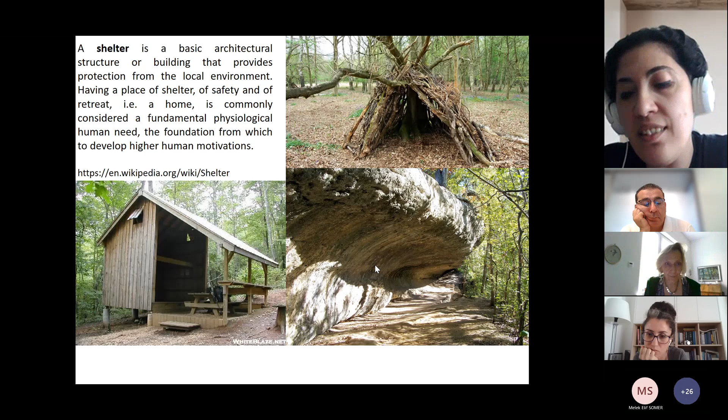So it is basically a shelter, as you can see here. And home and house are two different aspects - usually home is the place where one's affections are centered, and it is more about the feeling, but also the sheltering issue is critical in that sense as well. And then moving to housing, we can see interesting and different housing examples throughout the history of architecture.

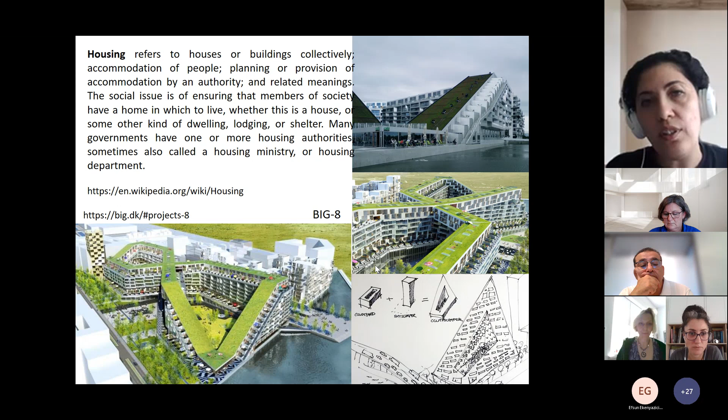This is a relatively new project, BIG's Project 8 in Copenhagen. And the issue about housing, public housing and mass housing is, again, one of the most important things we architects deal with throughout time. With the increase in population and urban growth, these kinds of housing projects became more prominent, and of course public housing became one of the most important issues. Especially social housing is one of the most important issues that we deal with, struggle with, or research about.

So what I'm going to present today is, I'm going to first focus on the existing housing examples, and I will try to explain a little bit about contemporary dwellings and housings. In that sense, I am very sorry, I am going to share again.

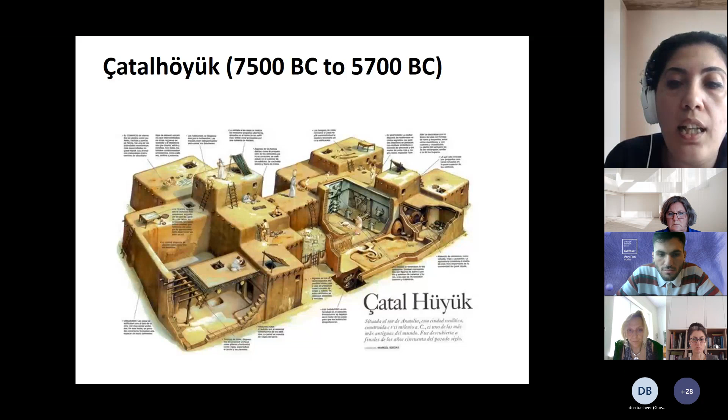The importance of this settlement is that it is one of the earliest and biggest settlements in Anatolia, and socially its formation is very interesting, because there was no hierarchy between the users, men and women - they shared and ate the same amount of food, and used the spaces equally. When you look at the structures, they were composed entirely of domestic buildings, with no obvious public buildings, which is also important because there was no hierarchy, governance, or religious dominance, we can say it that way.

At maximum there were 10,000 people living in this area, but the average population seems to be 5,000 to 7,000 at times, or as a reasonable estimate. The way they used the houses, as you can see here, was entering from the roofs - they used the spaces while entering from the roofs. So there were no streets; the roofs of those settlements were used as streets, which was also an interesting way to live.

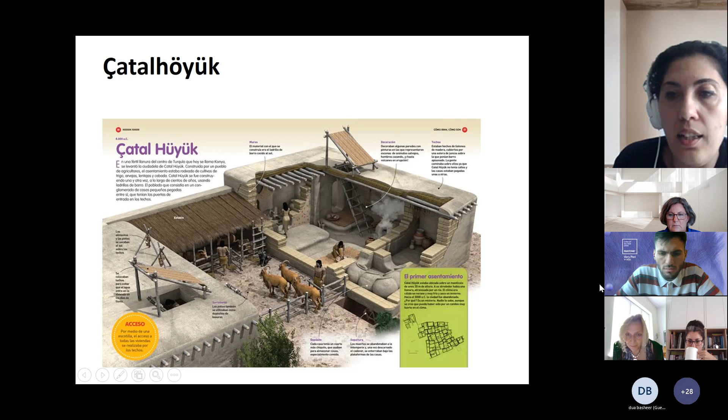The material is mud brick. The houses are mud brick that were cramped together in an aggregate structure, a kind of clustered honeycomb-like maze. As I mentioned, the rooftops were the streets, and the only source of ventilation were the openings from those roofs, as you can see.

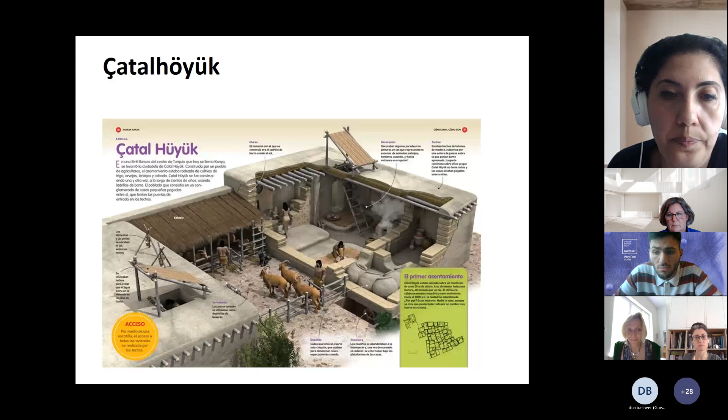This is the existing image right now. There were no apparent social classes, and no houses with distinctive features. This is important because after the vernacular architecture examples, we see different examples of hierarchy, royalty, or religious hierarchy. The most recent investigations also reveal little social distinction based on gender and social status, so that is important.

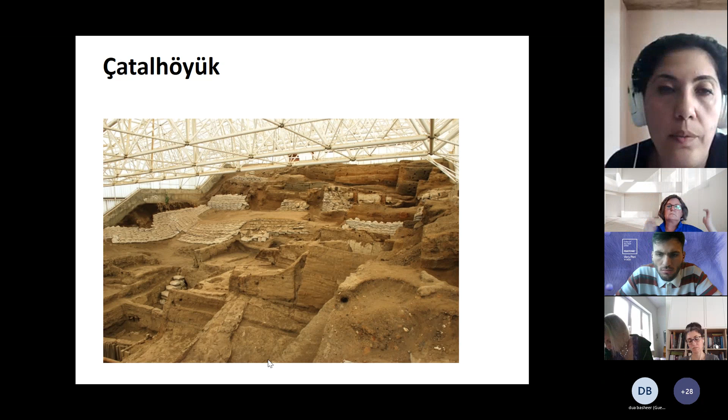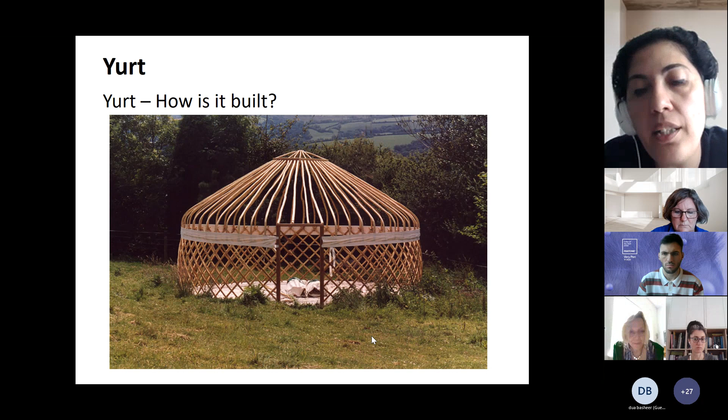Here you can see the details of the structure and how they are formed. In the center there is also a fire, not open, but a fire in the central part. You can see storage areas and sleeping areas around, because although the lifestyle is also nomadic, they were not hunters and were not moving very frequently. In wintertime they moved somewhere, and in summertime they moved another way, so the building seems much more structured and solid in that sense.

When we look at those vernacular examples, we see vernacular material - local and natural material - which makes it sustainable because they use the material they can find around. Usually the materials are wood, bamboo, stone, thatch, clay, adobe, mud brick, animal skin, etc. Wood, stone, and different types of adobe and thatch are the main elements. In some cases, concrete and cement are also used.

But the most important issue is that they knew how to use the material, and this knowledge accumulated over time. They also developed the formation of the housing themselves, designing for their lifestyle. If they needed wider spans or structurally stronger buildings, they built that. If they were designing movable or demountable houses, they designed that. So it was important that they designed with their needs in mind, responding to the environment and climate.

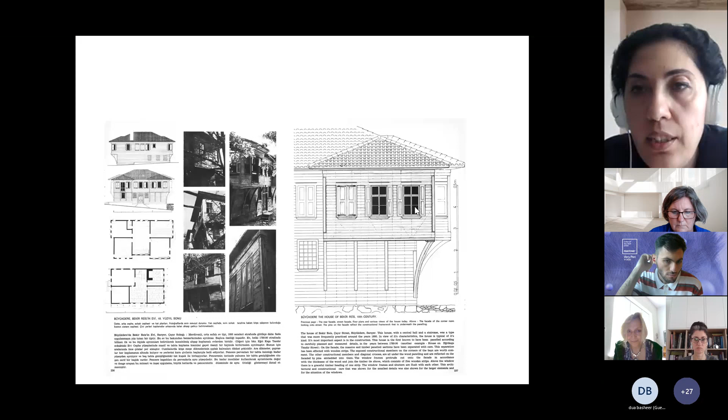And in a very hot climate, this is a traditional Malay house. You can see the usage of material, the creation of semi-open or open spaces, and how they tried to emphasize the climatic conditions inside the house much better, as shown in this sketch-like drawing.

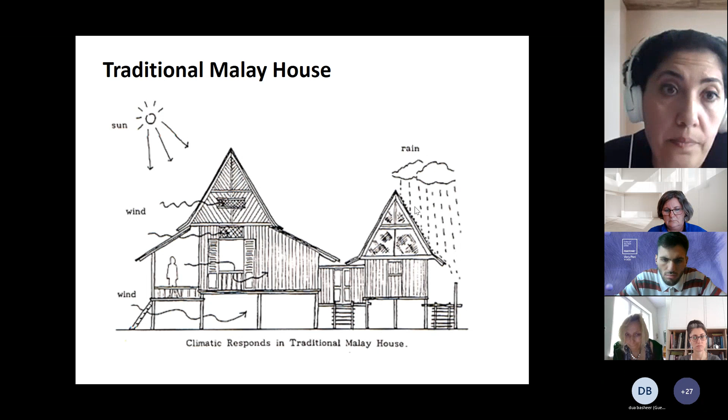So the material, even though the material is the same, based on the environmental conditions and the needs, the formation of the houses has changed.

Traditionally, the study of vernacular architecture did not examine formally schooled architects, but instead the design skills and tradition of local builders who were rarely given any credit for their work. More recently, vernacular architecture has been examined by designers and the building industry in an effort to be more energy conscious with contemporary design and construction, as part of a broader interest in sustainable design.

By definition, vernacular housing is naturally sustainable, and trained architects are inspired by this potential. But the issue is, again, what kind of sustainability - social, cultural, or usage of material?

When we talk about vernacular architecture, one of the most critical issues is that in the last 100 years, with rapid urbanism, unplanned populations, city growth and globalization, we see a great decrease in vernacular architecture examples, especially in the last 20 years. The deterioration is in critical condition all over the world.

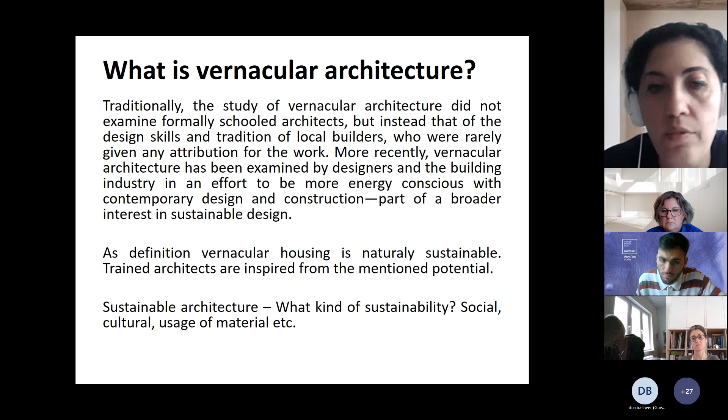Apart from some protected areas, with industrialization we are not only losing the knowledge, but we are losing the existing examples as well. So it is also very critical. Since we are talking about sustainability, it is important to mention this.

Sustainability has different aspects, and the important part is: what is vernacular material, and what is sustainable material? If you are using stone or wood right now, would that make it sustainable? Because the number of people, the population, and urbanization have increased, we need to find sustainable solutions and innovations in that sense.

But sustainability doesn't have only one aspect. It has many aspects, from economics to ecology, politics, and culture, and people need to accept it, people need to use it. It should be economic, it should be widespread, etc. But we can learn from vernacular architecture for sure.

So there are different approaches that architects, designers, and users take when talking about vernacular architecture. There are three approaches that can be mentioned.

One is the usage of natural and local material; re-evaluating and redefining the spaces based on where you are designing; and re-evaluating and redefining the traditions and culture. If you are not designing according to the user's tradition and culture, then it is really meaningless to design.

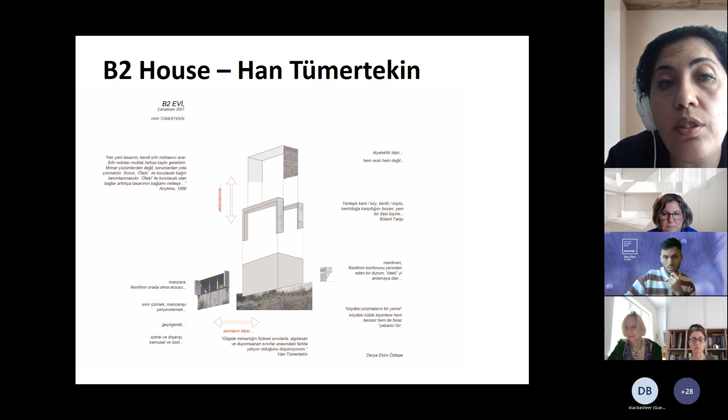Also, different materials are being sought today to make design more sustainable. Usage of bamboo is very widespread in some parts of the world, because it is flexible and lightweight, and it can perform better than concrete during earthquakes.

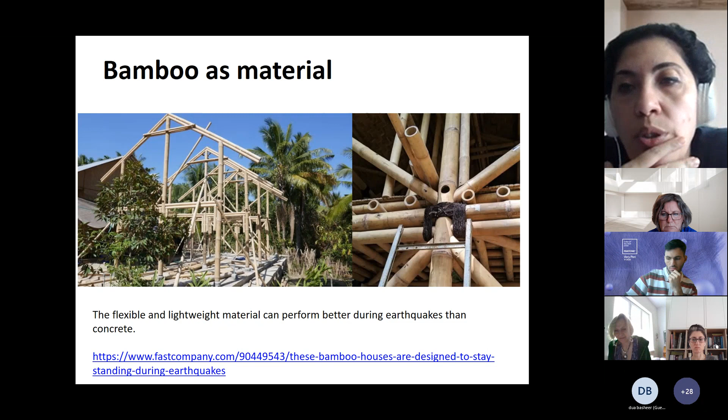But we can also see that some of these examples are not very well received, because people want to see, in that sense, a westernized house. They want to see big concrete buildings full of glass and steel and concrete, and they want to live the same way as other people.

So it's not only about the material, but especially in examples like Indonesia, it reflects the lifestyle. So concrete seems to be much more well received in that sense.

There are different researches about material - for example, Shigeru Ban using paper, which is an interesting approach. Shigeru Ban is a Japanese architect known for his innovative work with paper, particularly recycled cardboard tubes, used to quickly and efficiently house disaster victims. He designed and built several housing examples this way.

So it is really important how to use the material. Bamboo, even though it is a very effective material, is not very well received in some parts of the world.

With new technologies, there are new materials we can call smart materials, nanomaterials, biomaterials, etc. But these so-called intelligent or responsive materials need to be studied, and it is still very expensive and not that widespread. They have other aspects like sensor actuators, artificial muscles, or electroactive polymers for them to work. So even though development in materials continues, and we are not only using natural materials, different materials are developed, but it is still not as widespread.

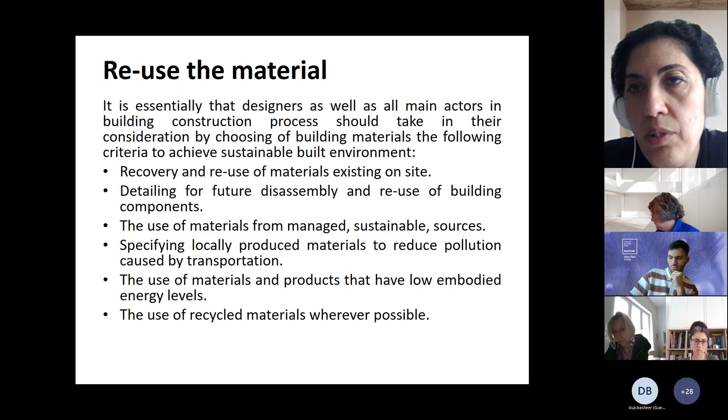So we have this vernacular architecture, and when we come to the Industrial Revolution, it marks a major turning point in history, and almost every aspect of daily life was influenced in some way. In particular, average income and population began to exhibit unprecedented sustained growth, and the standard of living for the general population began to increase consistently for the first time in history. Of course, it did not begin to improve until the late 19th or 20th century, not immediately after the Industrial Revolution, but in time it increased.

Immensely. So when we are looking at the industrial revolutions and the innovations, we can see the material base, there were innovations and inventions, and there were lots of innovations, and in urbanization we are seeing developments and innovations.

In the sense of architecture, one of the most important points is that until the Industrial Revolution, we were living more or less the same way for thousands of years, and after the Industrial Revolution that changed, because there are two main things that changed. One is transportation, and the other is the usage of reinforced concrete and glass.

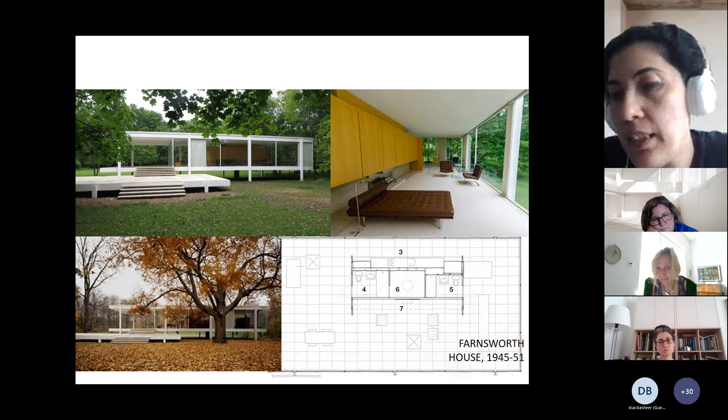At this point, I need to mention the new architecture approaches, and I'm going to show two images from Mies van der Rohe. One is the Farnsworth House, which is one of the pioneers of these glass and steel houses with all these open spaces, and the other is the Lakeshore Apartments, the apartment version of these houses, which in the upcoming years we started to see everywhere. Not exactly this type of apartment, but with the Industrial Revolution we started to see these high-rise apartments all over the world.

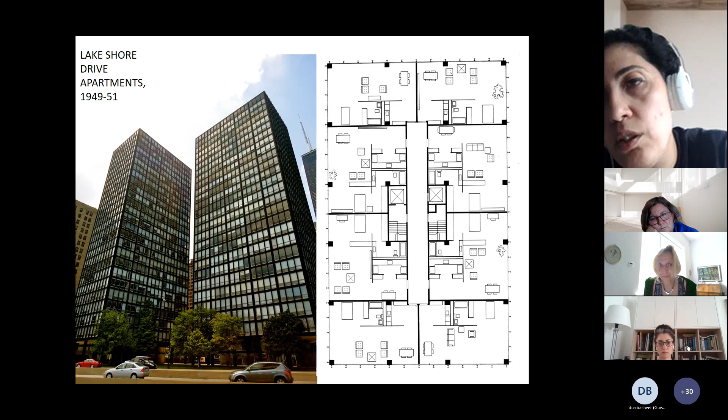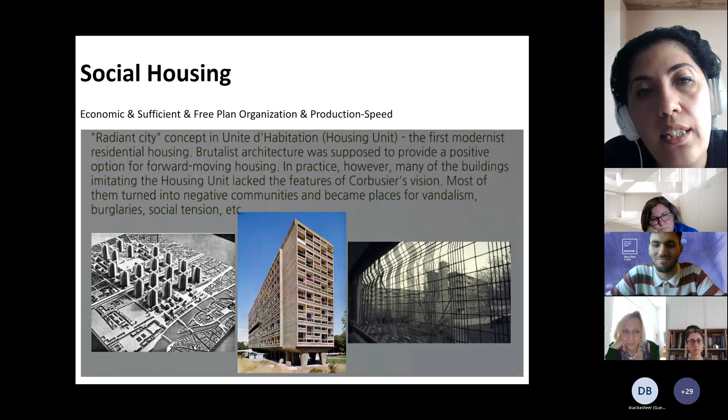Another example is, of course, Unite d'Habitation by Le Corbusier, not only as a social housing project, but also designed with modularity, reflecting Corbusier's vision.

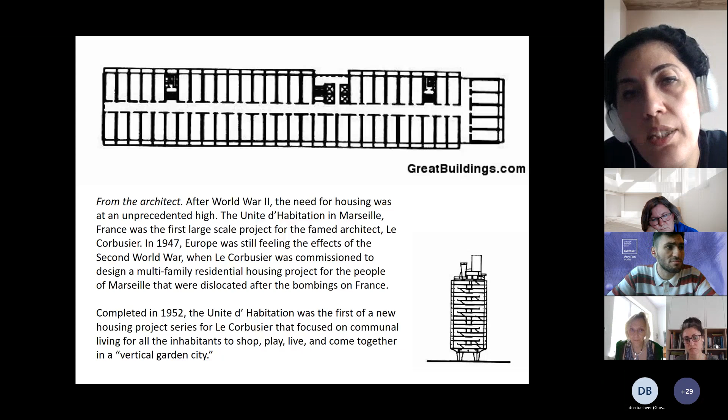This was a project with the minimum size, and how we are using the spaces and how people can live in that housing unit, how they can come together. So it is not only designing the house, but the lifestyle of the people as well. And it was really important.

We are seeing those kind of examples from the 1930s. At this point, two more mentions should be done. One is Ernst May's New Frankfurt project, which was a very progressive and large development for social housing, and also all the settlements related to it.

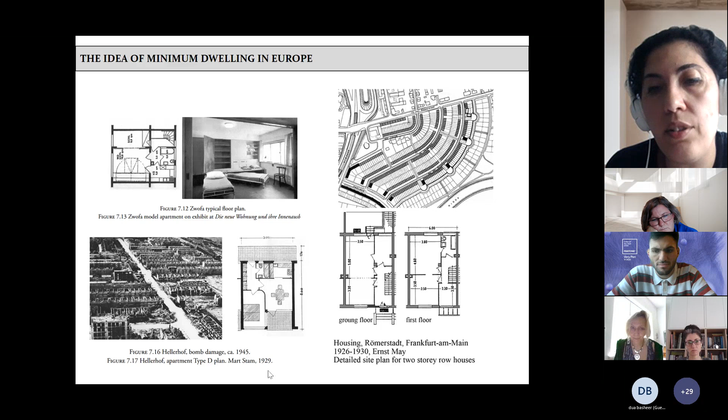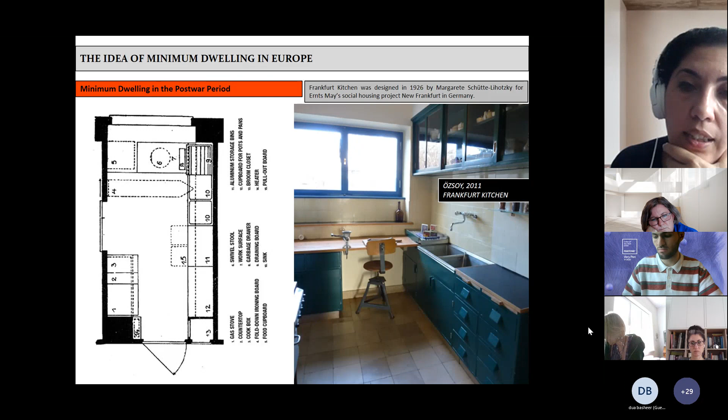Another point is, again from the same project, the Frankfurt kitchen, which also changed the functionality of the household problem and developed the prototype of the modern installed kitchen by Margarete Schütte-Lihotzky. And again, the Frankfurt project in Frankfurt am Main.

These are some examples. And then we are seeing the gated communities, which I'm going to move to the informal settlements, because in one sense we have designed these high-rise buildings, social houses and gated communities supporting different lifestyles and rich people. On the other aspect, there are those shanty towns, informal housing, slums.

You can name it differently, but due to the lack of housing, people started to solve their problems by building their houses themselves. In informal housing, the lack of physical services and infrastructure, and sometimes the lack of quality, is the central point. Those are usually deprived areas, potential crime zones, with lots of safety and security problems.

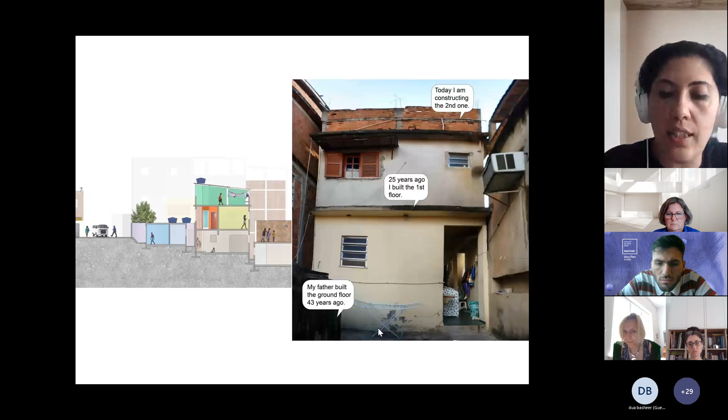This image is one that I like most because it shows that, based on the users—since they grow up—the house grows incrementally, related to the user's need. But the problem here is, of course, the quality of the material and the quality of the structures, whether they are structurally durable or strong, etc. So there are different aspects in that sense.

At that point I need to mention this Kowloon Walled City, because it is also a very striking example. It is demolished now, and a new park has been designed in its place. But when you look at the settlement, which grew over time, it created a very dense, catastrophic site. If you wish, I can also send you the link for this example.

It was in Hong Kong, and at its most dense time, tens of thousands of people were living in this area. There were lots of security problems, criminal issues, unregistered people living there, and lots of crimes were mentioned in that area at that time.

In Turkey, we also experienced that kind of informal housing. From the 1950s on we see this kind of examples, and it grew rapidly. The formation of this housing is, in that sense, later than the favelas in Brazil, but it has occupied a huge part of the cities. The problem is that they have also formed the street structures and the basic organization of the streets, because even when they are demolished, they use the same systems and so on.

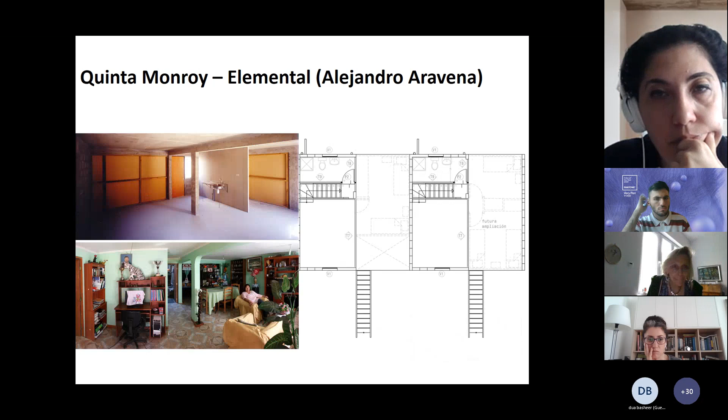There were these informal houses and there were formal houses, those high-rise buildings, those high-rise modern housing as Le Corbusier designed. But there was also an interesting housing project, Pruitt-Igoe, which was built according to these modern approaches, but it didn't work, and all these housing units were demolished in a very short time.

It was a kind of very iconic point as well. So while discussing the sustainability issues—Belinda hocam, I cannot hear you. Can you hear me now?

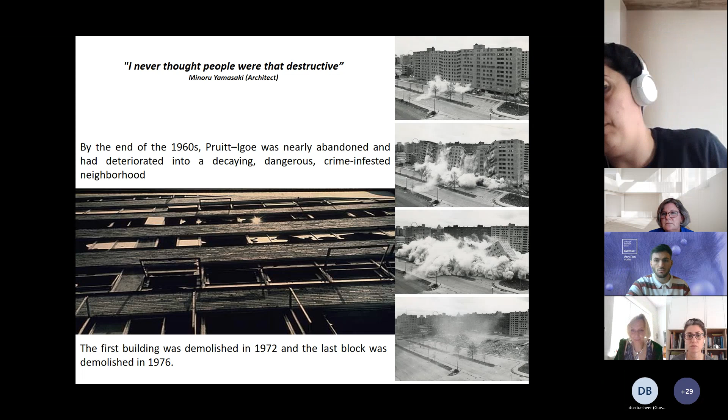Yes, okay good. So while discussing modern architecture and this high-rise building, this project should also be mentioned because, even though it has the same features as other projects, due to segregation, users not being involved in design, or their lifestyle and culture not being related, the social sustainability of the project was ignored, and these housing blocks were demolished.

It is a kind of iconic point in modern architecture, and when you research the depth of modern architecture, this is the iconic building you see in that sense. So this is also important—why one building is flourishing and the other one is demolishing is because of the social sustainability.

Coming again to contemporary and futuristic approaches, in modern architecture we see those effects from the Industrial Revolution and industrialization. But when we look at contemporary architecture, meaning belonging to now, even though right now the left images are modern architecture, the right ones are contemporary ones.

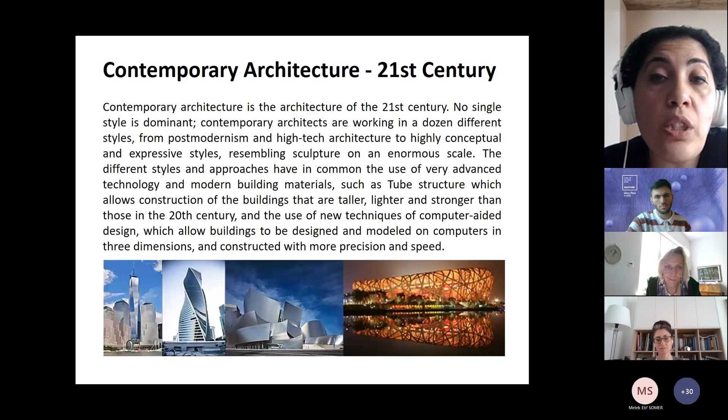And also, when technology is included, we can say that form became a little bit more dominant. Different forms can also be built, and enormous scales can be built, and so on. But when we look at the housing aspect, since the beginning of 2000, we are seeing those high-rise buildings being built.

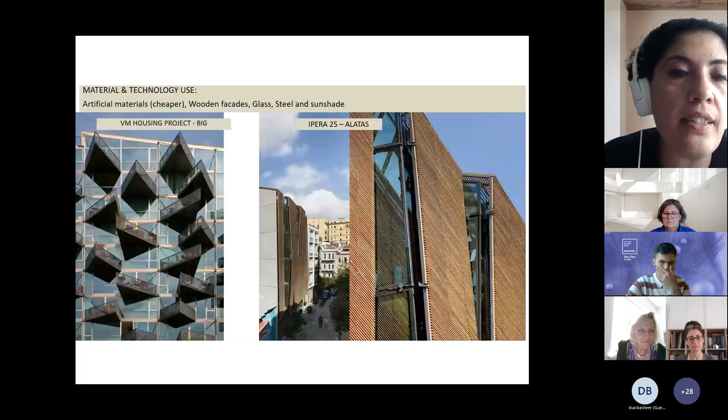But when we discuss what kind of dwelling units people prefer today, or whether they are sustainable, or what kind of innovations they have—smaller touches or personal innovations can be seen. But in fact, we are seeing similar housing units again all over the world, in very large or very small scales with different materials—usually glass, sometimes wood, or maybe curtain wall facades, etc. But more or less, we are seeing similar examples.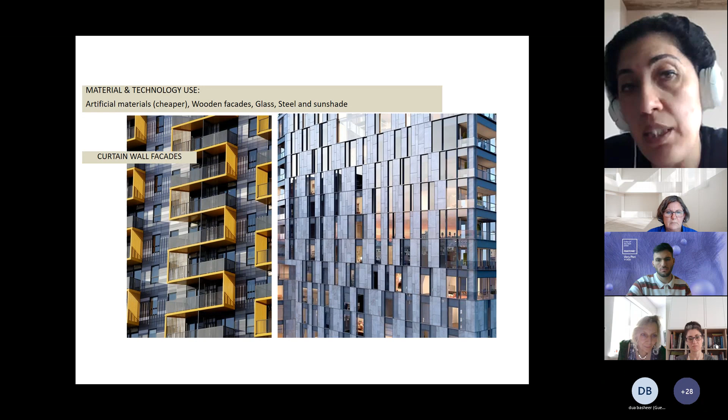At this point, I want to talk a little bit about experimental projects from the 90s to today, and I'm going to finalize it with contemporary approaches and examples. I have only 20 slides left, so I think I will finish in a short time. The housing examples in the 1930s are really interesting because they were focusing on future and technology—they were trying to design different houses using developed materials, and they were experimenting with this.

So it is really interesting to see that. I'm going to show three examples. One is this Dymaxion house by Buckminster Fuller, which I will show the Dymaxion car as well.

This was designed and developed by Buckminster Fuller to address several perceived shortcomings with existing home building techniques. Buckminster designed this considering ease of shipment and assembly, which was one of the core issues. He named it Dymaxion to combine the words dynamic, maximum, and tension, trying to emphasize the concepts he wanted to express in his inventions.

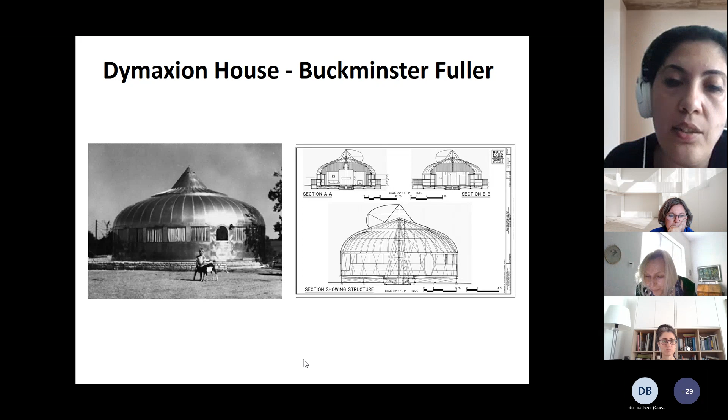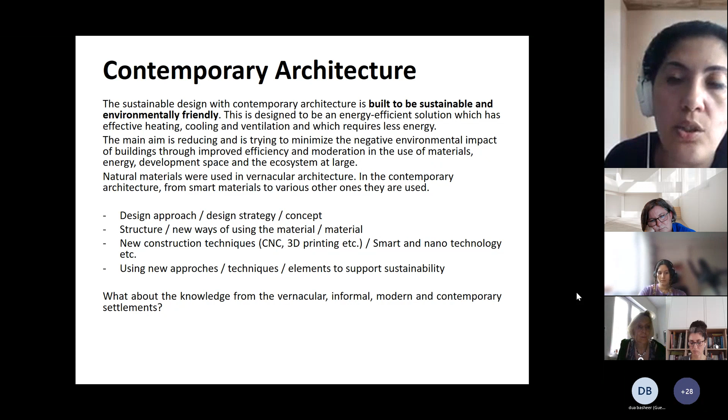Looking at this new architecture, I'll show a few examples. This is the Bosco Verticale, the vertical garden by Boeri Studio. They calculated micrometeorological studies and climatic characteristics, and designed the facade, the green elements, the vegetation, and the plant distribution of each floor based on orientation, sun exposure, height, and microclimatic calculations. So instead of creating reflective facades, they are creating their own facades and their own ecosystem with plants and vegetation.

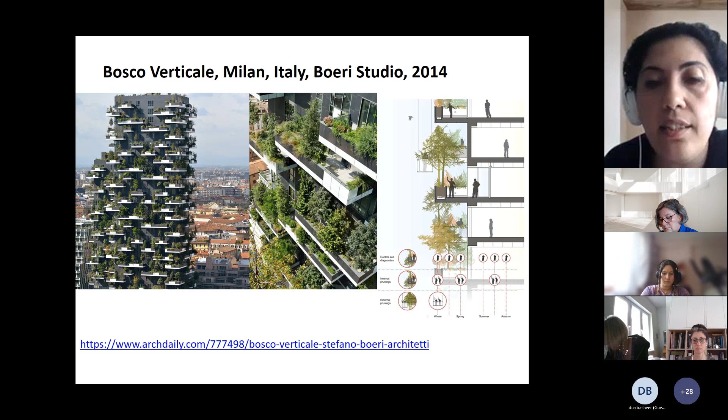Also, looking at new examples, 3D printed houses are in fashion. We see different examples of this kind of housing. Even though they use different materials and different CNC techniques — even with adobe — they are building different houses using CNC techniques. So it doesn't have to be smart materials; it can be traditional materials, but with these computational approaches, they build different houses.

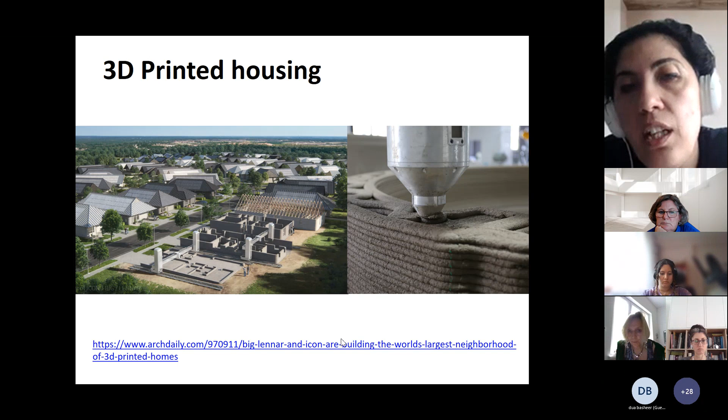Looking at these computational approaches — starting from 3D fabrication methods with traditional, natural, and even smart materials — we're seeing it in different ways. Game engines, which I'll talk about shortly, and analysis using computational tools designed with developing technologies. There are calculation powers from computation, visualization powers from game engines, and tools for designing whether you're an expert or not, using different materials — even though smart and nano materials are still expensive and not widespread yet, we are seeing this kind of approach.

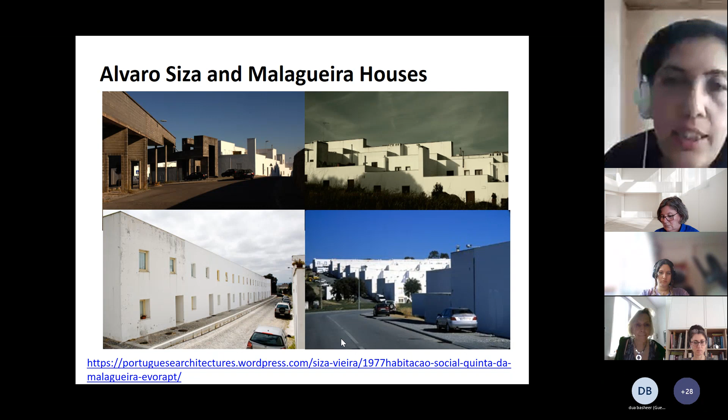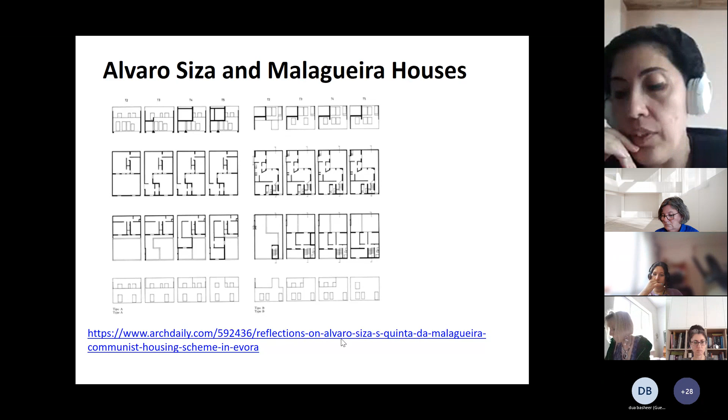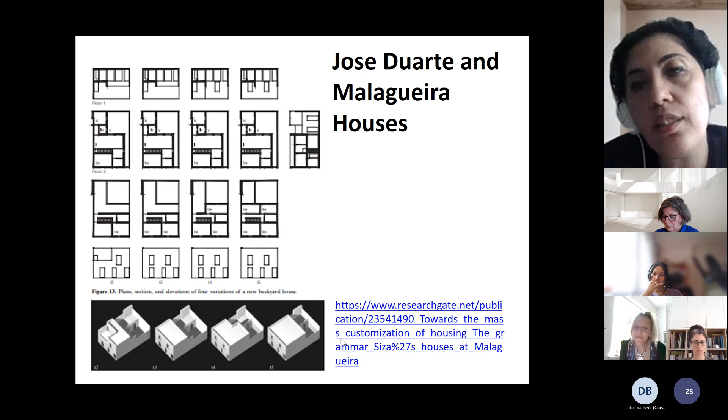This is an interesting project: in this study, SAAL — Siza designed these houses in Malagueira, in Evora, Portugal. He designed based on user preferences over a long time, step-by-step, as a cluster of houses, arranging and designing each unit himself based on interviews and communication with the users. Then, with a computational approach, Jose Duarte worked on the design, interpreted and transported this knowledge to the computer, recreating these houses and their alternatives. The critical point is that Siza designed with user participation based on specific needs, while in Duarte's design the user is not at the center, but the variation is.

Of course there are houses for various types of users, but the change in logic is that in this kind of mass housing project, numerous variations are created rapidly so that users can select one. The houses are not designed based on a specific user's needs, but variations are created so users can select one that accommodates themselves.

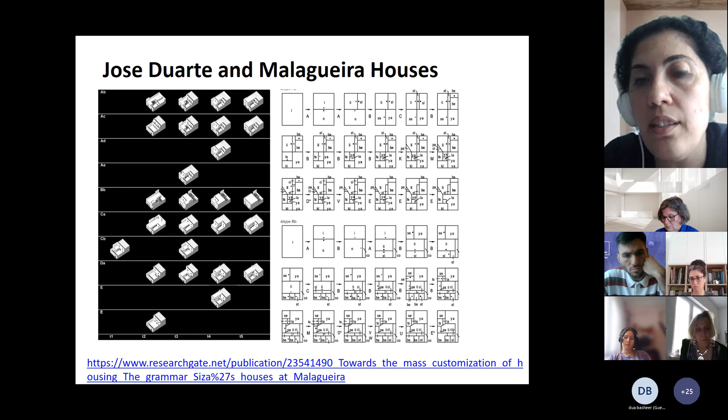With new game engines, renders and tools can be developed and designed. These are some developed tools, but designers can also develop their own. You don't need to be an expert in computational technologies right now to design — with these game engines, you can design your own tool or make your own calculations.

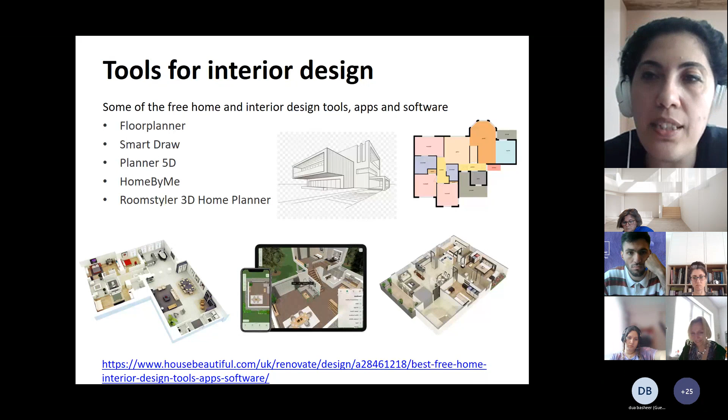Of course, it is not that easy, as I explained, but still it is doable, and we are seeing lots of research like that. Again, vernacular inspirations are important, and tools can be generated with this kind of approach.

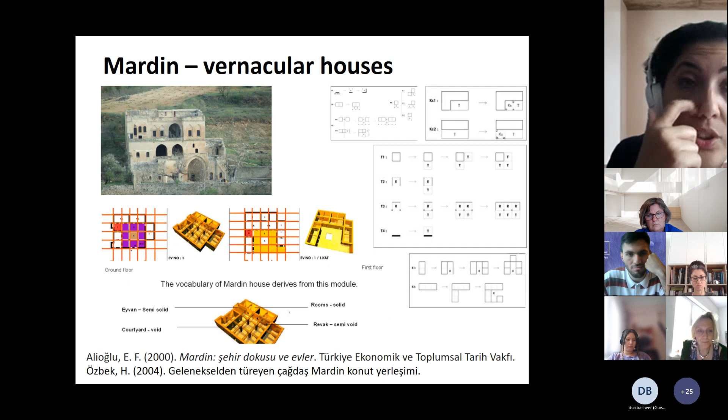I want to mention one of my studies, from my master's thesis. With vernacular inspiration from the analysis of Mardin houses, the typology and generation by computer, housing typologies have been defined. This way, sustainable additions of new houses, or generating new houses using the same language, is doable.

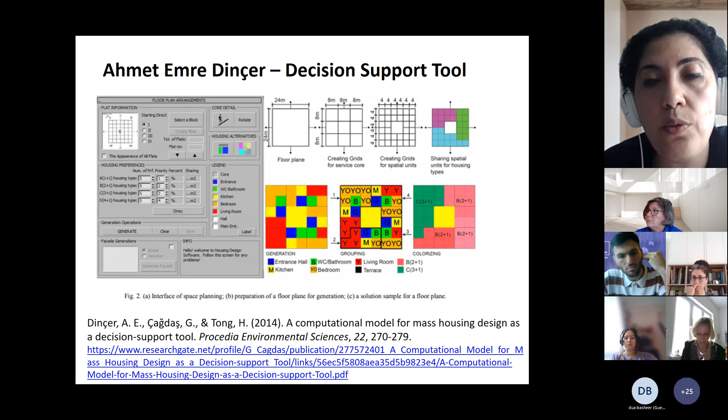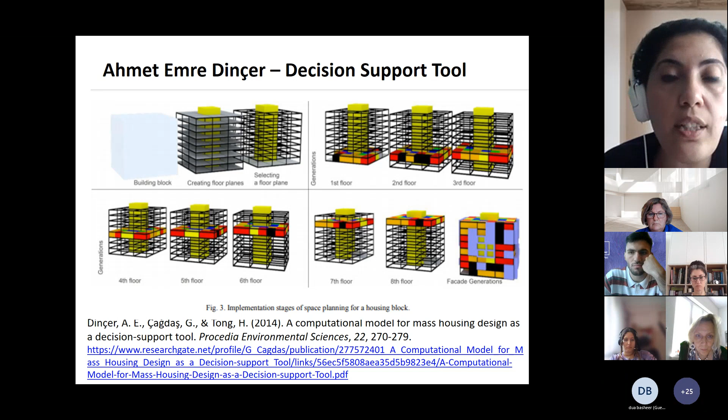Another tool is a decision support system for an apartment block, based on the user's needs and the organization of the facade, so alternatives can be generated much more quickly. You can see these different plan layouts, facade organizations, etc. This is also interesting and important.

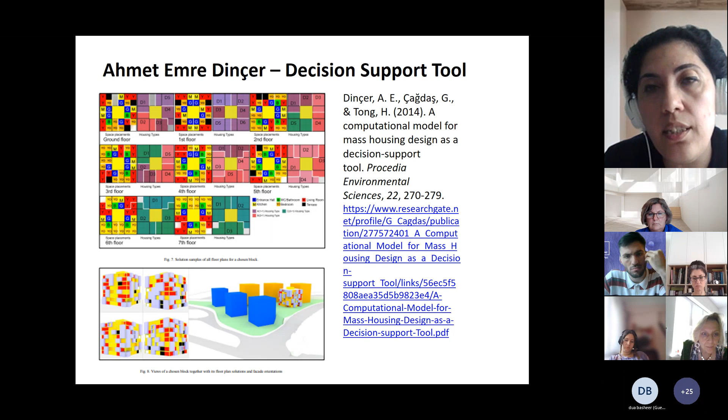So in short, to wrap it up, in the future of housing we are seeing more attempts toward greener and sustainable housing alternatives, especially energy efficient, green, more integrated with nature, using sustainable strategies. So in one way or another, the new sustainable approach is using one of those strategies.

Material and structure is interesting, and extreme structures can be seen, as well as mobile examples, or even examples without foundations. New fabrication methods show new innovative smart materials as well as new printing techniques.

We are seeing new forms. They don't have a common form, but more smooth, curvilinear, circular, organic forms can be built easier with new technologies. And with parametric design strategies, it changes how we understand starting the design and using the parameters of the design.

But when we look at these new approaches, if we ask where is the user in this design, it's a question to be discussed, because in all those approaches the user has moved from the central point to a secondary or even lower part of the approach and usage. In architecture, usually the users were central, but now with those approaches, the user is not in the central part, and the approach has changed.